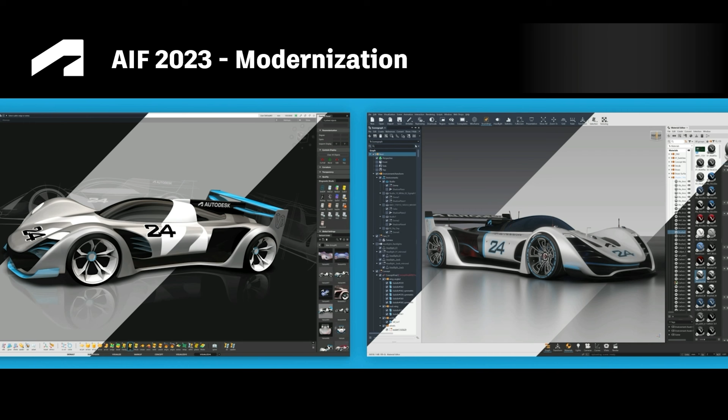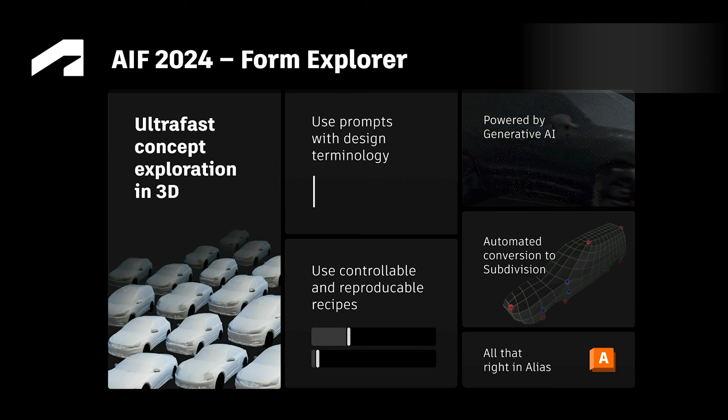Before we look into the future, let's look at the past. Back at AIF 2023, we delivered on a promise after a very long journey, which was the modernization of our apps, Alias and VRED. Then last year on this stage, we showed our first prototype of AI capability for creative form finding, called Form Explorer. Also at AIF 2024, we introduced a collaboration with a company called Navasto, real experts in predictive AI for simulation. As most of you know, Navasto is now not only part of our company, they are part of our team, which is amazing. Great to have you guys on board.

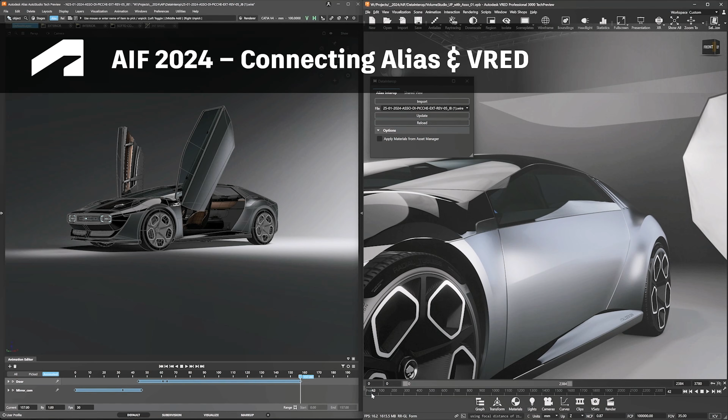Last but not least, last year on this stage we made another promise: to connect Alias and VRED seamlessly for the first time. This is not only the connection of the applications, this is the connection of the personas and the functions in the studio. So today, we're not only delivering on that promise, we're giving you an opportunity to change your process, to change the ways you work, with Alias and VRED being truly connected for the first time throughout the whole process.

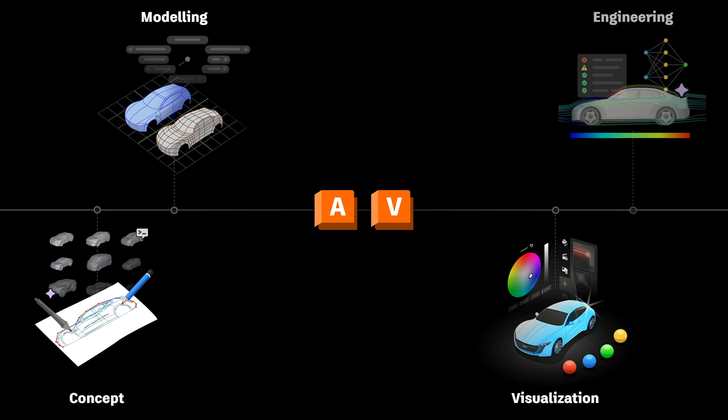So we're talking about concept, we're talking about modeling, we're talking about visualization, and we're even talking about some aspects of engineering. Now, for the first time, we're connecting the process end-to-end with Alias and VRED at the heart of it. So now, let's look at these connected workflows.

Welcome, everyone. For many years, we have all wanted to have a closer, better, barrier-free working between Alias and VRED. In order to make you guys more creative and do it all faster, you need a barrier-free way of working with the best-in-class tools. So I'm really excited to be able to talk to you today and show you what we've been working on, and how we are connecting our applications that help connect your design studio.

I'm going to start today by talking about three different areas. To bring modeling and visualization closer together, we're going to talk about how we're using shared components between our applications. We're going to talk about how we connect the core data next, and then finally, how we build connections across the entire studio. By doing so, we're going to give you visual consistency, something I'll touch on many times through the next couple slides. Let's start with the components.

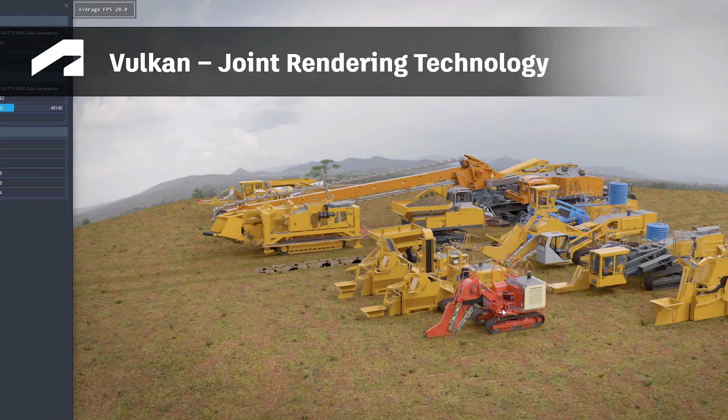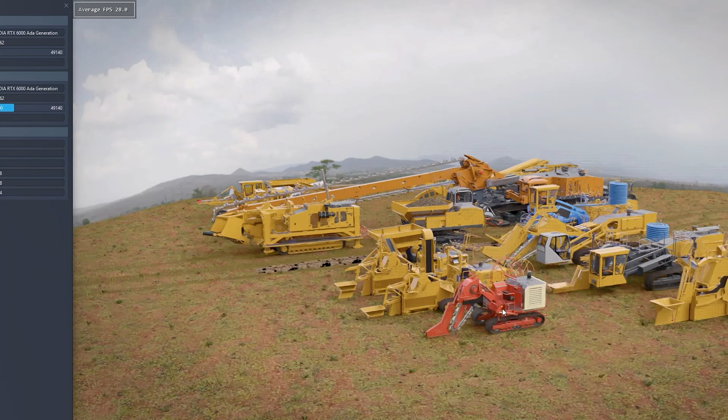Last year, we spoke about the changes we were making to rendering technology—migrating from OpenGL to Vulkan, a modern rasterization renderer that would give us the groundwork for amazing things in the future. Now Vulkan is becoming reality. It has become the shared rendering technology between our applications. It offers speed and high performance for handling really complex scenes. It better manages lots of lights that you put in your scene, making your images look beautiful. It gives us new visual improvements like screen space refractions and more realistic performance for displacement mapping. We believe that Vulkan will really change the way you work in real time.

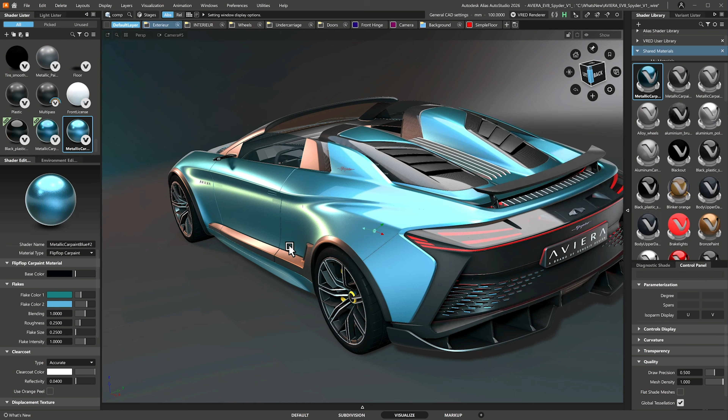More excitingly, with 2026, Alias now ships with VRED Vulkan technology. That means inside of Alias, you have VRED rendering along with VRED materials. The modernization of these graphics allows you to have better visuals, but more importantly, it brings consistency across the project—consistency with materials from beginning to end. Those shared materials mean you can achieve an identical look with the same lighting conditions, and it also means you can save time by reusing materials across your design projects.

And not only have we added support for VRED materials, but we've also added support for viewing AXF, MaterialX, MDL, and Substance materials. And we're partnering with Covestro to really enhance and extend our integration of measured materials.

And you can learn more about that tomorrow in our deep dives with Pascal.

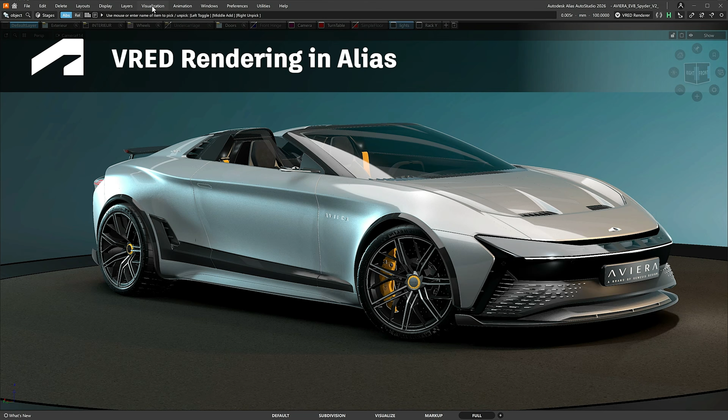And of course, this new VRED renderer in Alias also just provides better visualization throughout creative modeling and technical surfacing. It gives you new render settings to control the environment, lighting, ambient occlusion, and the addition of new color space and tone mappers. All of this gives you the ability to make the applications both look alike, while giving you a little bit more creative control.

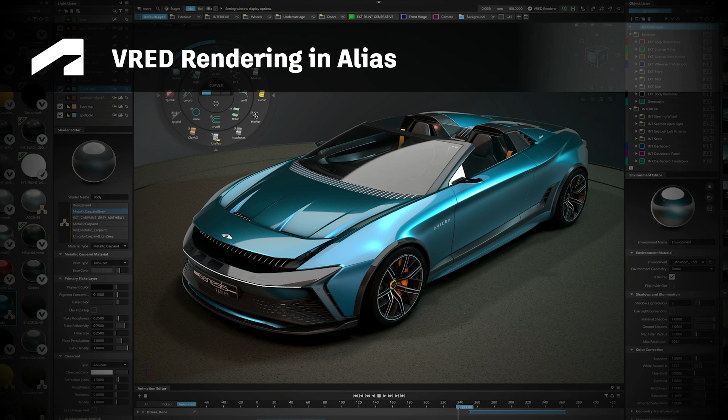So with VRED rendering in Alias, now you can have visual consistency from the beginning of the design process till the end. Visual consistency builds trust. Trust between the applications, but also trust that can extend into the real world. This trust means you can take more informed decisions earlier in the design process.

But next, we're going to talk about another project. And we're going to talk about how we're syncing the core of our applications, something we're calling live referencing. With both Alias and VRED 2026, you may have already seen this, we've released this new feature workflow we call live referencing. It was created to solve collaboration across the studios, between our applications, but also how we connect your teams and departments. More importantly, how we unlock new ways that you can work.

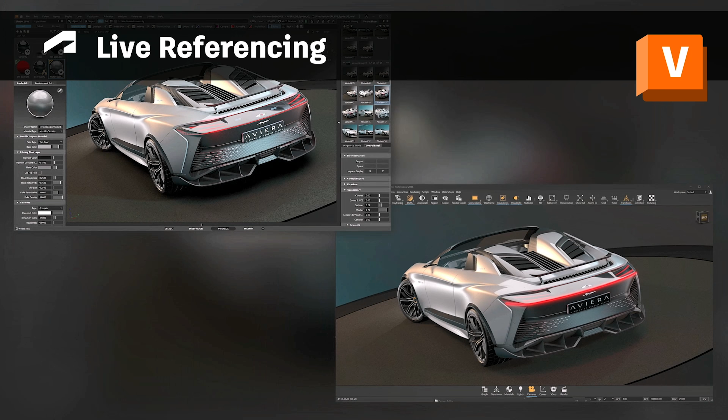So with live referencing, we now can do a lot of different things. We can fluidly sync important data and information between Alias and VRED, and also do so in almost real time. We can support the ability to update your scenes automatically, almost live in real time. We can eliminate rework with the addition of non-destructive overrides. We save you time through speed and high performance of loading data. We really think that live referencing will change the way that you design your vehicles today.

And importantly, we made it really easy to use. So enable it in Alias, choose a couple settings, whether you want it to be live updating or not, and you're good to go. Now you go into VRED, you open your live reference or create the live reference to that Alias file. The data loads extremely fast, and now you can begin working.

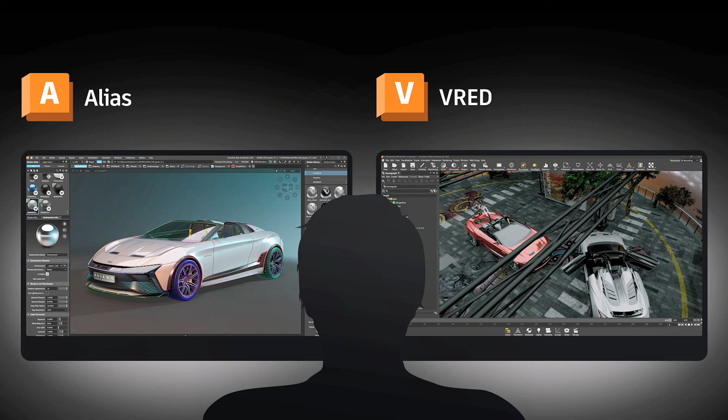So this sets up a really good workflow for lots of different people. Let's start with the individuals. This works great because they can use the power of both products side by side, taking advantage of the tools that you need when you need them. Like, for example, we'll hear more about later, our new render guide.

Enable live and automatic updates in our applications, and you can see surface changes happen instantly. The most valuable part here, though, is the overrides that we maintain. So as you can see in this example, you can maintain things like transformations and material assignments that are all maintained as the surface is being changed. This means that you can mock up ideas and concepts earlier, push them along faster, and at the same time work fluidly with Alias and VRED side by side.

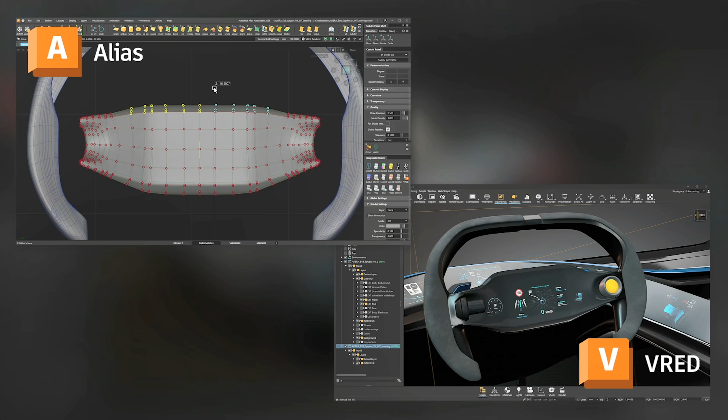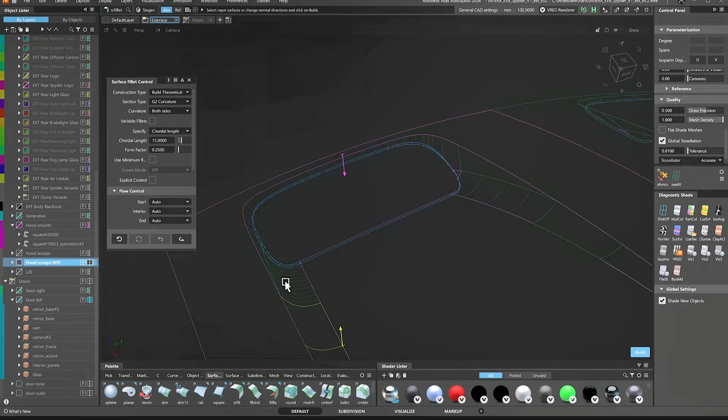But more importantly, it's really about how live referencing adds to the values of all the different ways you already work. So when modeling hands over components to visualization, those parts or files can be updated so many times during the process, and many times that adds a lot of overhead. You have to rebuild scenes, restart from scratch, rebuild or assign materials or variants. But now, with live referencing, we are enhancing your capabilities.

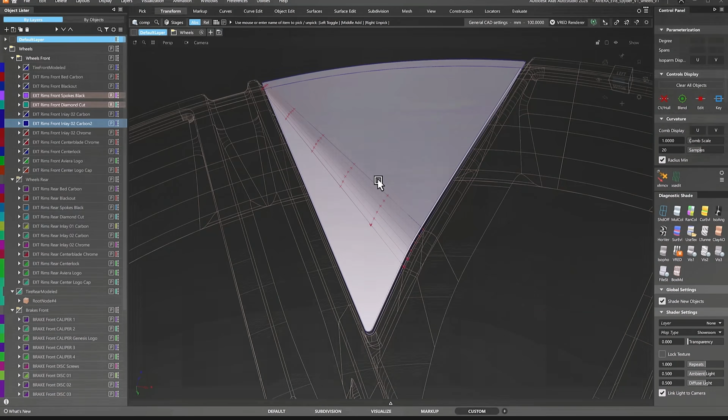Viz artists can create live references to a bunch of Alias source files alongside other data, like engineering data. They can choose when they want to update, and now updating is really fast. In the past, when you've been crammed for time to make sure to get something in for a review, and you didn't know if it would make it, now be sure that it can, with really quick updates, and see the latest changes at all times. All of this means that your models can continuously evolve, as they do in real life, and you will always be ready to review.

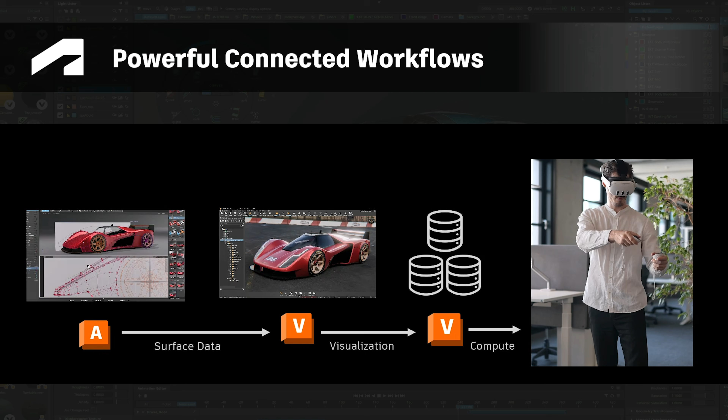At all times in this workflow between our applications, you can use Alias and VRED side by side, but VRED continues to be powered by high-quality hardware technology you may already have. You can run a streaming service to a display in your studio showing an always up-to-date version of how the model is evolving, or power a high-end review through XR or on your Powerwall. This means you can make live surfacing changes in real time, get feedback directly, and make decisions as those changes are happening.

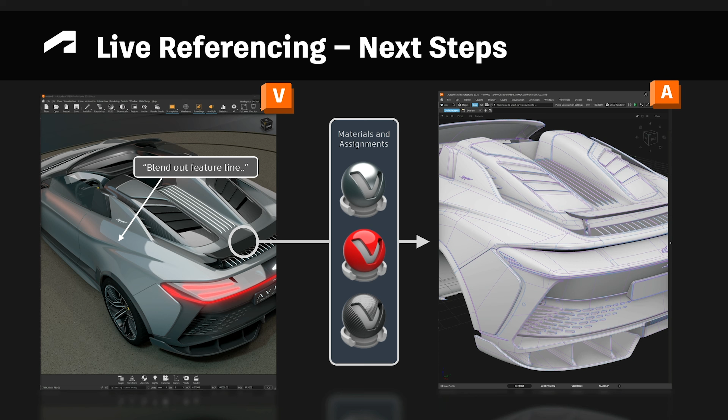Our focus for our '26 releases has been about getting Alias data into VRED very quickly, with good support for material overrides, transformation overrides, and more. But we also have a plan to sync things back. The two main ones I'll mention today are support for materials—so if you do material assignments in VRED, those can be pulled back into Alias—and review information, being able to take notes inside VRED and have those flow back with cameras or viewpoints.

We are super excited about live referencing and the technology it brings. We think it will help you save time and go faster, simplifying data handoff, supporting effortless updates and non-destructive overrides. It gives you enhanced capabilities, letting you use the right tool at the right time, and we're hoping it takes collaboration to the next level between users and teams, helping you make decisions fast.

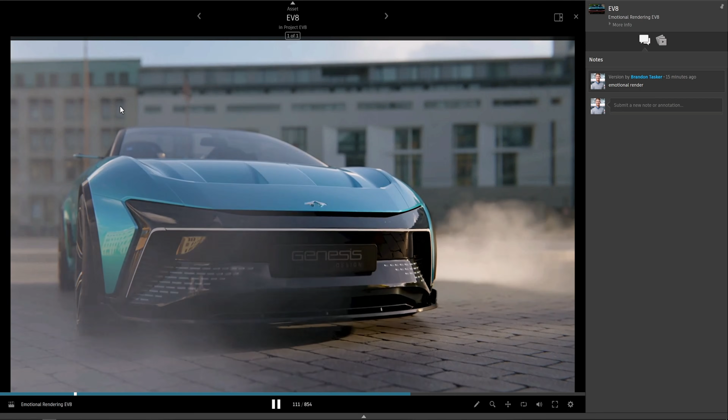Connecting our apps wouldn't be complete without Flow production tracking. Rendering in Alias and live referencing really complement working alongside Flow production tracking, which continues to be a critical tool given all the business pressures we're facing. This is a quick reminder of three ways we support you: Flow production tracking helps design collaboration through all types of handoffs, helping teams work together with structured organization. It adds transparency for everybody in the studio and for decision makers—knowing how projects are progressing helps you make informed decisions at the right time. Finally, it supports new ways of working; FPT and its ecosystem help you build powerful workflows that automate tasks and accelerate your design process.

So to summarize: VRED, rendering in Alias, live referencing, and Flow production tracking are building workflows that help you connect your studio, save time, and create the best designs you can with visual consistency from start to finish.

Awesome, thank you. Isn't that exciting? We're bringing our tools closer together than ever before, creating a connected system that amplifies the value of both individual products. And we're not stopping there.

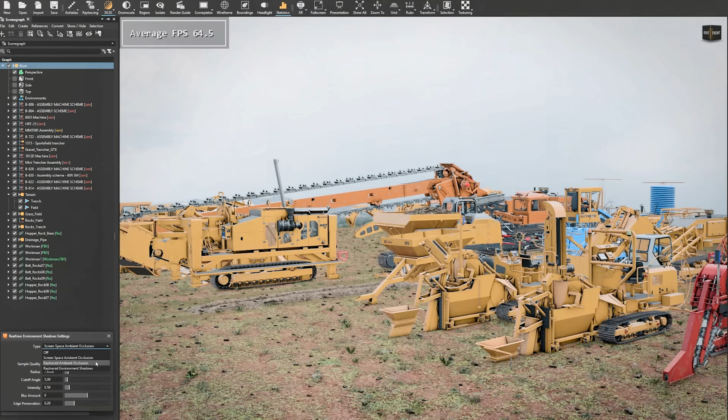All those features and effects work across all of our render engines: GPU ray tracing, CPU ray tracing, and the latest addition, called Vulkan. In Vulkan in VRED, we have additional hybrid ray tracing capabilities. You can, for example, add ray traced reflections or ray traced shadows on top of your rasterization image, lowering the computational cost while improving visual quality, and enabling use cases that were challenging before, like ray traced XR. This also reduces cloud computation cost for cost-sensitive use cases like online configurators or streaming systems. We'll continue to expand Vulkan's capabilities, with the next goal being direct and indirect illumination. So stay tuned for updates.

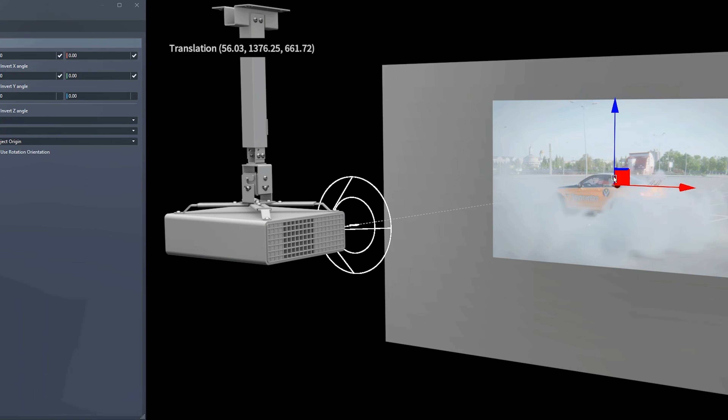While visual quality is key to evaluating a digital prototype, functionality is also very important. That's why we are adding both functional and physics-based constraints to ensure digital prototypes reflect the mechanical behavior and functionality, allowing physical interaction based on physics with the final product. For example, interacting with a car like opening a door in XR, opening the trunk, pushing a button, or rotating the steering wheel will behave just like it would in the real world.

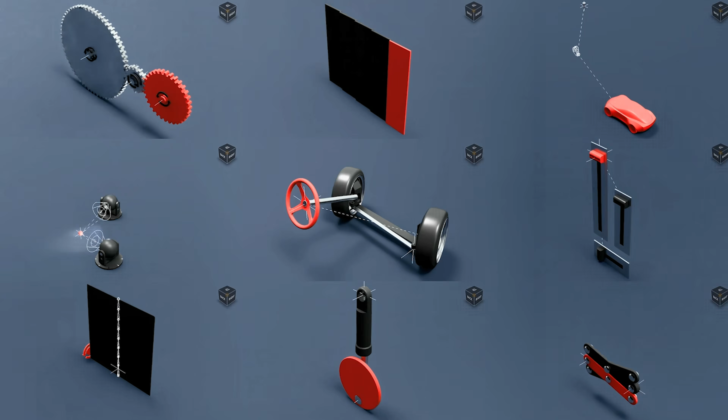We are also overhauling our already very powerful variant handling system, the variant sets, from VRED, making it more powerful and flexible with the addition of dependent variants or cascaded variant sets, as well as metadata, making digital prototypes not just look, but also behave realistically.

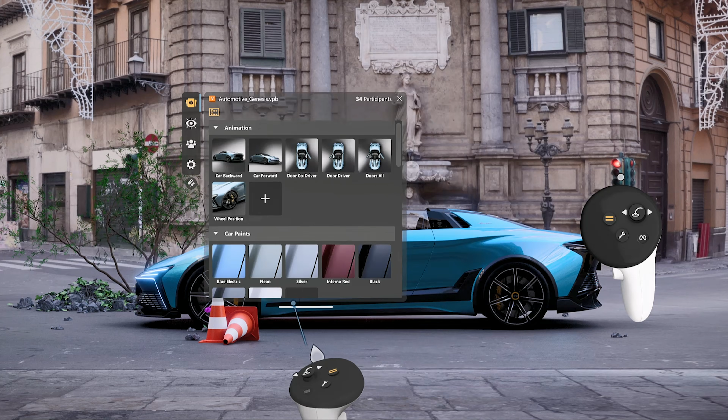Speaking about intuitive and realistic experiences with digital twins, XR plays a huge role, of course. It's becoming increasingly popular since see-through mixed reality and augmented reality is more common and easier to use. Some of you saw very impressive demos down there with the Apple Vision Pro or the Quest 3, because people feel more natural and comfortable when you can see your colleagues and merge the real and digital world, not enclosed in a virtual reality experience.

As it was with VR, we have completed support for OpenXR, providing all the XR hardware suppliers and partners an interface to connect to the VRED XR capabilities.

Next, very exciting, we're looking at overhauling our in-XR experience. You see some sneak peeks, some ideas that our teams have, in the video already. It's been more than 10 years since we started XR in VRED, since the menu was implemented, so we really want to make that more modern, more intuitive, and most importantly, more customizable, tailored to the needs of designers, modelers, visualization specialists, but also managers and decision makers. Now that we have a seamless connection in our tools, we can really focus on one holistic solution for XR that fits the needs of every stakeholder in the automotive development process.

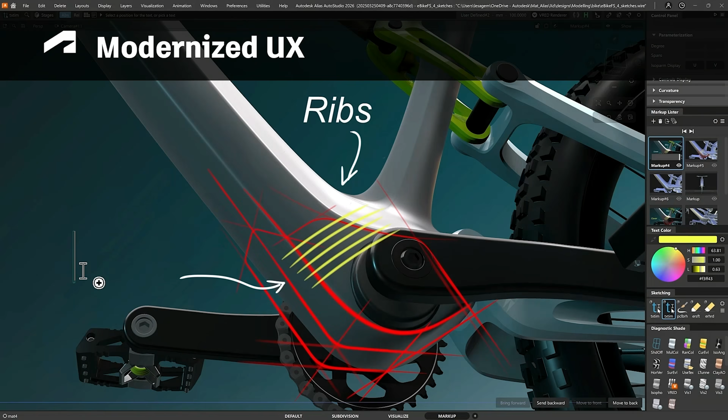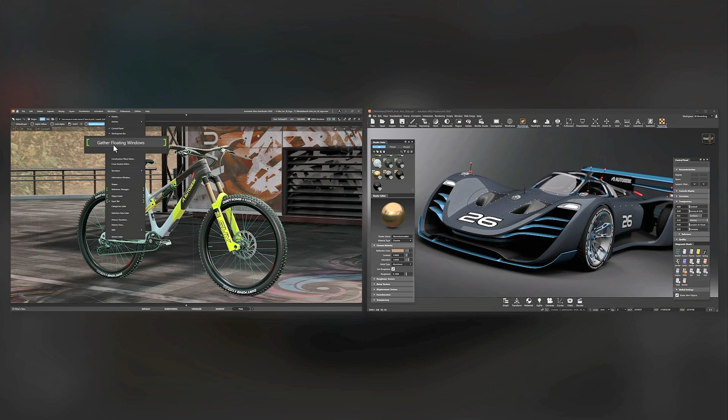It's not just XR that is evolving. We are continuously improving the user experience of our desktop products as well. After unifying the look and feel of Alias and VRED a few years ago, now we're fine-tuning the UX to maximize productivity. In Alias, you'll find enhancements like layer bar improvements, a text tool for markup, a function to gather your windows in case you lost them on a second screen, and updates to the palette and the shader lister, among other improvements. It's really important for us to not just have very capable core capabilities, but also to make them easily accessible, easy to learn, and efficient to use.

And for Alias, the core competency obviously is around modeling and surfacing. So let's start with the improvements around sub-D modeling.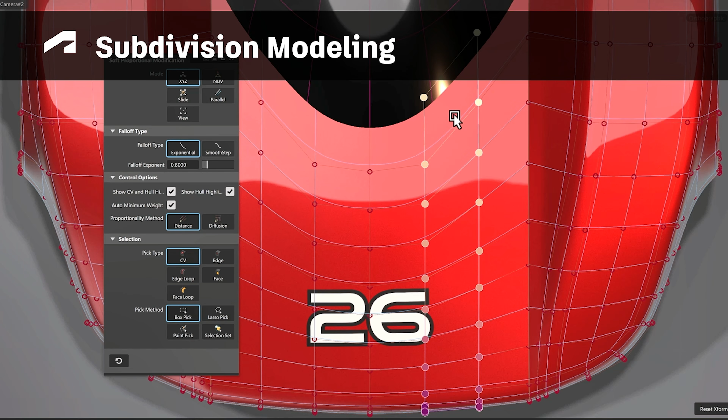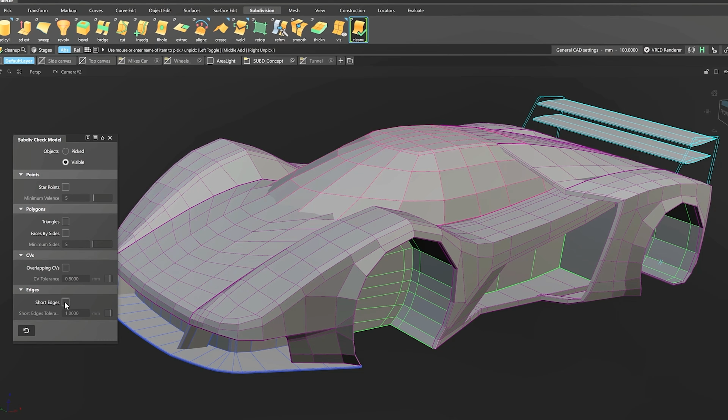Before we go into details, I want to highlight something. I have to go through the features pretty quickly, just highlighting some to give you an overview of what the teams have been doing and working on. Tomorrow afternoon there's a deep dive from Barry for Alias and Pascal for VRED, and I really encourage everybody to go in there, because I could only pick a few and give a few sentences to describe. But I think all the features are worth way more visibility and more detail than we can get in this one hour that we have here.

So let's get into it. Soft modification is the first feature I want to highlight in the sub-D section. It's a new tool that allows for proportional transformation of selected CVs with customizable attributes like fall off. Many of you know soft modification features already. This, combined with flexible selection modes like lasso, box, or painting, is a huge time saver for sub-D modeling, but also works for other CVs in Alias, so also for curves and NURBS.

The second one, and that's what you see on screen right now, is the sub-D check model. It's an automated tool that helps check and ensure the quality of your sub-D models, evaluating the control cage and highlighting issues you might have in a model, like star points, triangles, short edges, or overlapping CVs. So it's really a tool to assure that you can hand off clean data to a colleague or a different department, and also make sure you can check data you get from a colleague if it meets your quality standards or the quality standards of the job you have to perform.

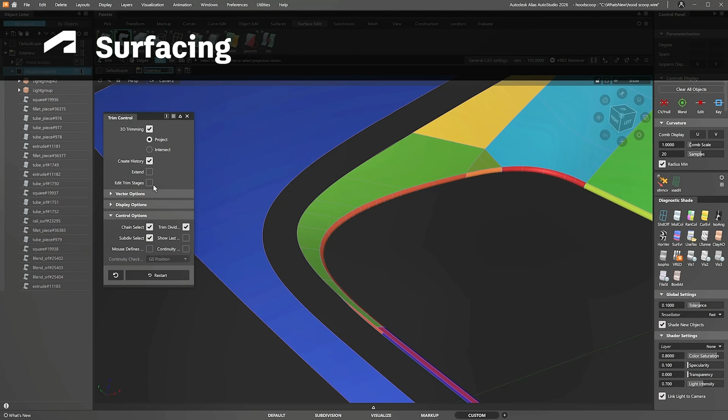But the very essence of Alias is high quality surfacing, and we have been continuously improving that space as well. Again, I can only highlight a few key features.

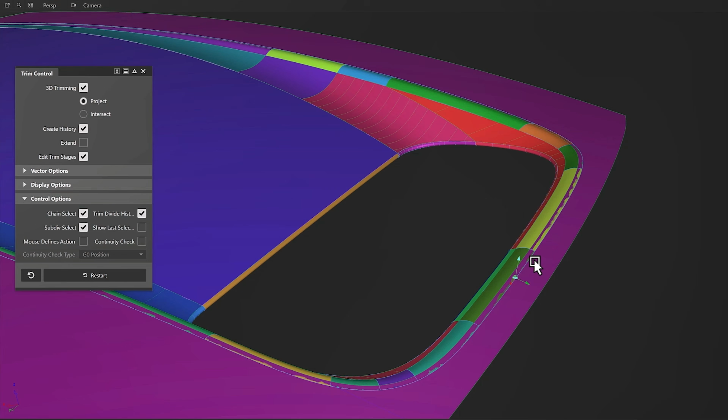I want to start with what you see on the screen right now, editable trim stages. This allows you to selectively modify trim operations without affecting others. So there's no more need to untrim stuff to change something, like going back in the sequence of trimming, or undoing the most recent trim operation to achieve something. It's a huge time saver because you avoid all those extra steps you had to take in the past.

The next one is trim extend. The trim tool is now smarter, especially when extending a curve on surface. It automatically switches to linear calculation when the extension would have failed in earlier versions.

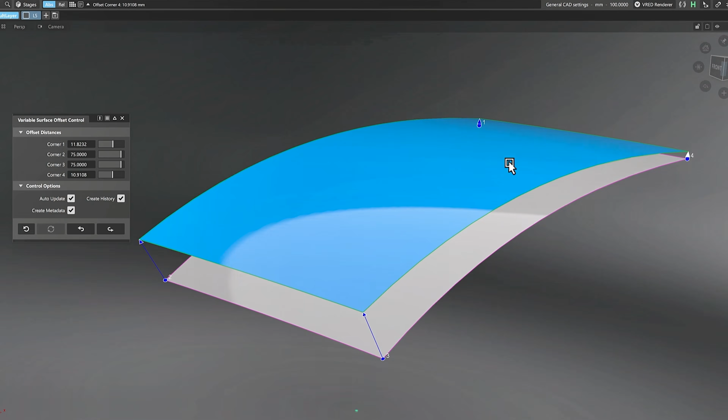And last but not least, the variable offset tool. It's a new tool to create non-uniform offset surfaces, enabling you, as you can see, with more control to control the distance of the offset based on the surface corners or edges. We are continuing to invest in surfacing excellence, focusing on improvements around corner blend or surface fillets and more tools you use on a daily basis, using both traditional but also more innovative approaches.

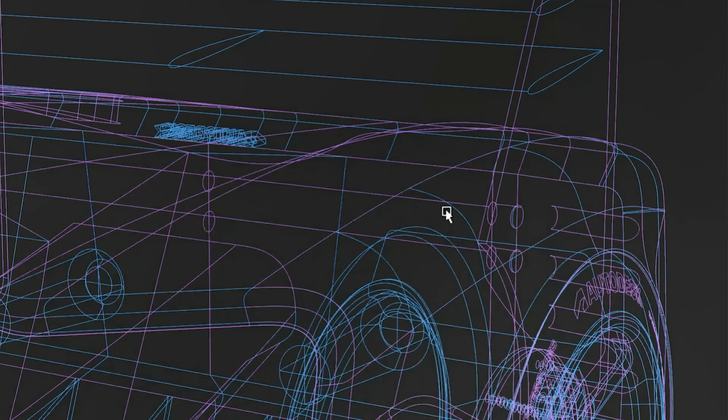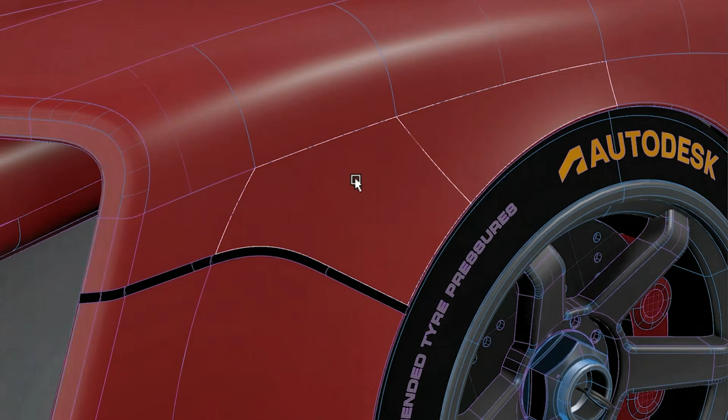Finally, I want to give you a sneak peek into something our teams are working on when it comes to where NURBS meet surfaces, or when sub-Ds, or when you want to convert the two into each other. We all know Alias combines this very unique approach of hybrid modeling between NURBS and sub-D, which is great, but sometimes you still don't have one or the other and you want to convert it. So our teams are working on tools that allow for semi-automatic, easy-to-use conversion between the two types—whether you need to convert an old NURBS file because you want a sub-D version to model on top of it for more flexibility or easier handling, or if you want to convert a sub-D model to NURBS for downstream use. This will allow for a smooth transition with minimal effort.

So you can see that we are strengthening our core capabilities, the very essence of our products, while modernizing their user experience to make it more accessible, easy to use and to learn, and more efficient. This work now pays off for both Alias and VRED users, as we have this connection between the tools with live referencing. We can now really focus on the tool's core competencies, as they are seamlessly connected, and we don't have to replicate a functionality in one or the other, because you can just move from one tool to the other depending on the job you have to do. So the core capabilities of our products are stronger and more powerful than ever, and we'll keep innovating to stay cutting edge, just as we have been over the last decades.

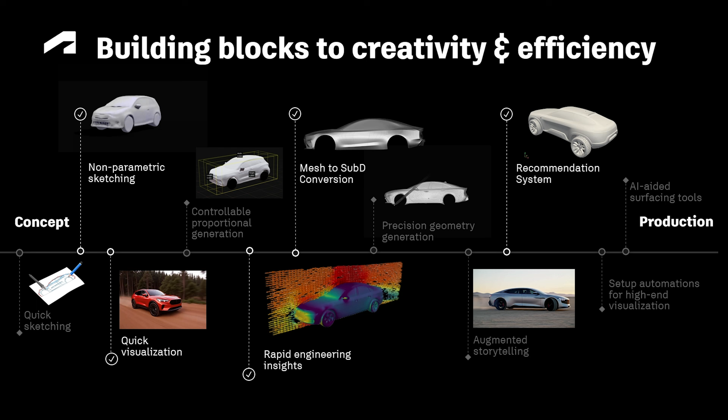In concept design, we're thinking about how we can speed up concept iteration with new ways of sketching and new ways of integrating language prompts. In modeling, we want to bring faster form development and more control and guided editing into how you use 3D AI tools. In visualization, we aim to speed up storytelling and help your teams align faster. And on the engineering side, we're bringing performance data earlier into the design process with things like Navasto.

So across all of this, our goal is very clear to us: we really want to accelerate design workflows and bring Alias and VRED users closer together.

We have three core principles guiding how we're building AI tools. Number one, we want to generate functional geometry that's useful to your teams and shorten the path to usable geometry. We want to help you share compelling product stories, removing friction from design storytelling. And we want to connect disciplines through data, transforming data that's trapped in your engineering or design organizations into a resource that can accelerate design decisions.

Starting off with functional geometry, Mike showed this morning that Autodesk is doing a lot of research on pushing the state of the art in 3D generation. There's a lot happening in industry and academia, and we're working on integrating different aspects of this technology into automotive design.

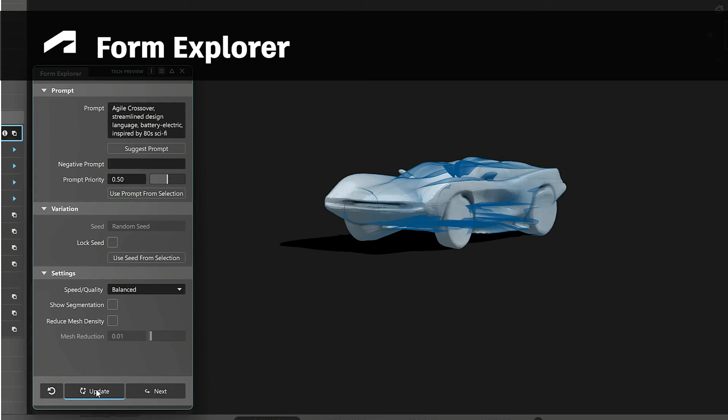As mentioned earlier today, the first step of this is Form Explorer, the first integration of 3D Gen AI into Alias. It's a plugin that allows you to create vehicle concepts in seconds. A user can leverage automotive-specific design language to generate and refine explorative concept geometries. It delivers a real-time experience, real-time interaction, and editable outputs that help designers generate automotive exteriors in seconds.

The unique thing about this is where the magic of natural language meets design. Using just a few words, designers can instantly explore a wide range of concepts, sometimes fast, sometimes exciting. They push your creativity forward by generating ideas or concepts that you might not have otherwise come up with naturally. This novel creative exploration process can help you break creative blocks and give your team a broader foundation to build ideas upon.

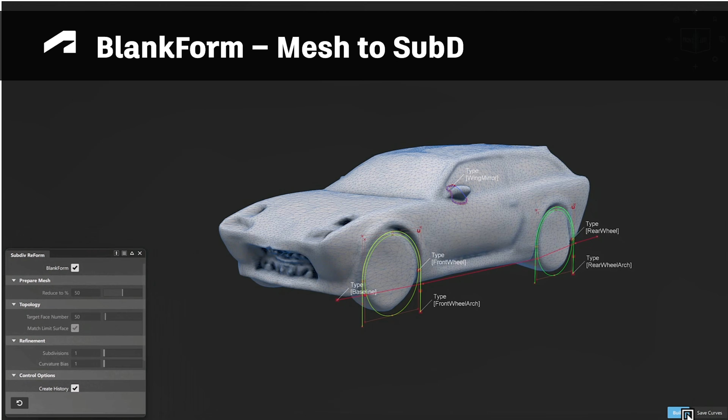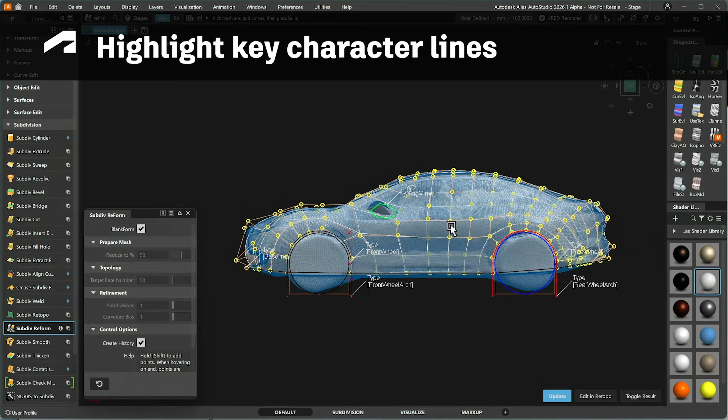Once you find a novel shape or form that you want to explore, you want to turn that into a functional geometry, a sub-D that you can modify further. So what we've been working on, an evolution of reform called BlankForm, gives you the power to transform a mesh into a usable sub-D model: first by making a conversion, then by highlighting key character lines that the AI generates, which are the core expressive elements of what the AI has produced. Using these guide curves as constraints, you can align control vertices in your sub-D model and create a refined surface.

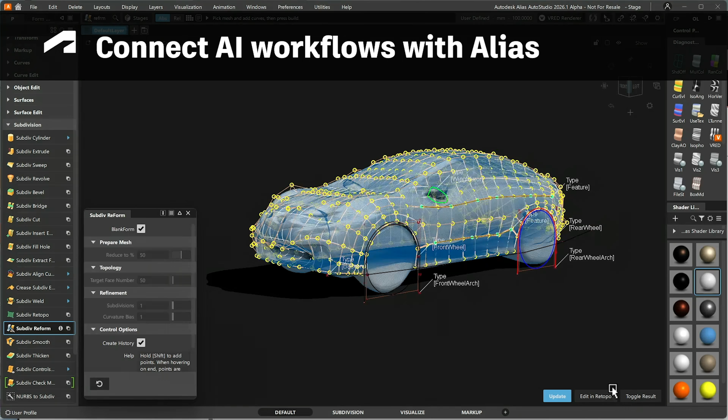In this way, you can create a refined iteration of a new subdivision surface and add or remove guide curves to emphasize key features. The core idea here is that we want to help you remove any noise generated by the AI and transition into detail surfacing as smoothly as possible.

So to also accelerate concept storytelling, we've been exploring different ways of integrating image generation AIs into Alias and VRED workflows. The first exploration we've created is something called Snapshot, which allows you to generate and share explorative image concepts quickly.

You can use Snapshot together with live referencing to create visuals generated from meshes created in Form Explorer. So whether you want a photorealistic render, a sketch-styled image, or a simple shaded view, it's all built into the interface. You don't need to switch into another tool or export files.

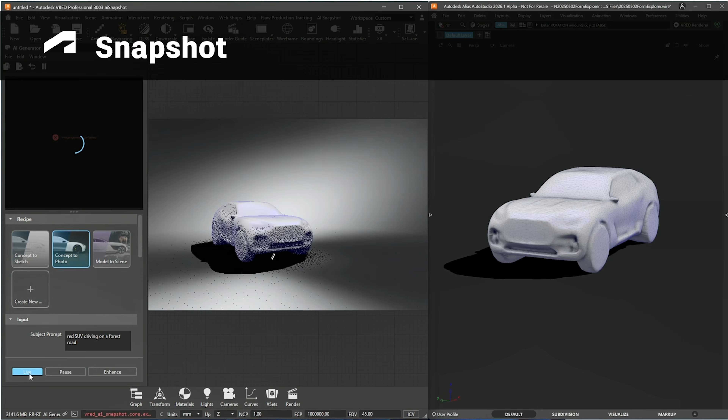It gives you a helping hand in preparing for a design review or a conceptual review, or just getting some quick visual feedback. And once your visuals are ready, you can send them straight into Flow Production Tracking.

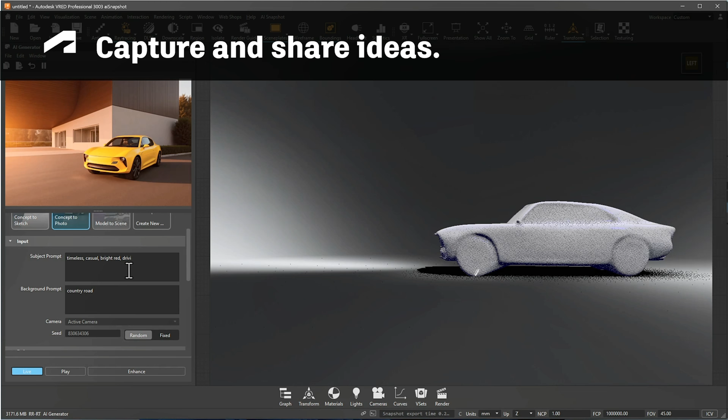That means no more saving screenshots to your desktop. Just share it directly in Flow Production Tracking with someone on your team—no lost links and emails. It's really just a quick way to get an idea recorded, share it for feedback, and even get it marked up with quick iteration comments, and move on with an effective design faster than ever.

So putting it all together, Form Explorer allows you to evolve an idea from a blank page. And when you have something you like, you can create a visual of it in Snapshot and share it with your team in Flow Production Tracking.

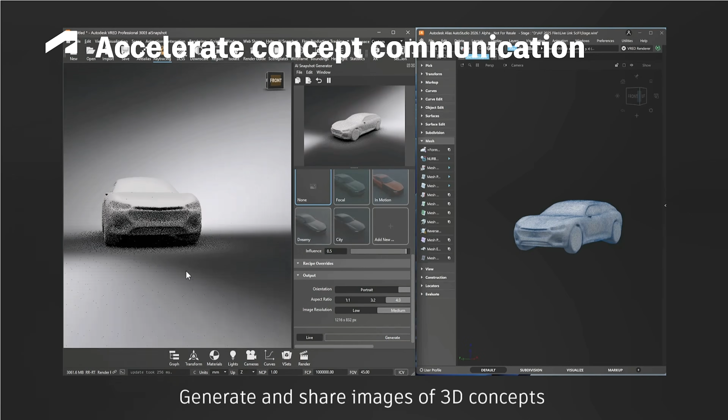Using blank form, you can take every mesh that you generate with an AI and refine it using the same subdivision tools that you know and love from Alias. All of these capabilities combine to accelerate concept design and concept communication, bringing you closer to a winning idea. So I'm going to hand it off.

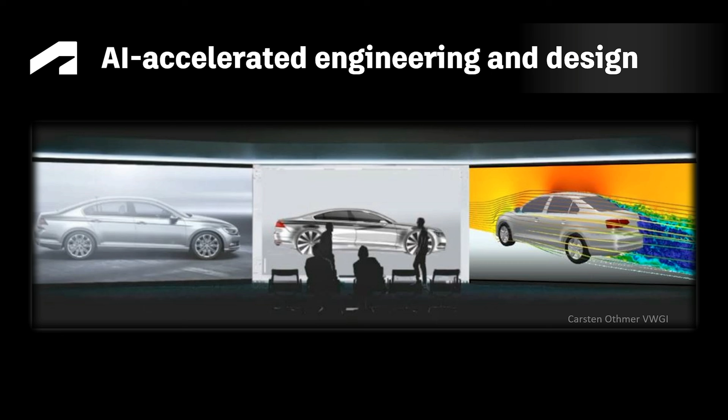Our idea of AI-accelerated design and engineering is that people from different departments are enabled to meet in one room and work together interactively. They can produce new designs, evaluate the impact of design changes on performance, identify areas worth fighting for, and everything in real time.

Since those AI predictions, even on a laptop, just take a few seconds, you can really work in real time and make decisions within that meeting without having to postpone those decisions to the next weekly meeting, since you have to wait for time-consuming simulations from the high-performance computing system.

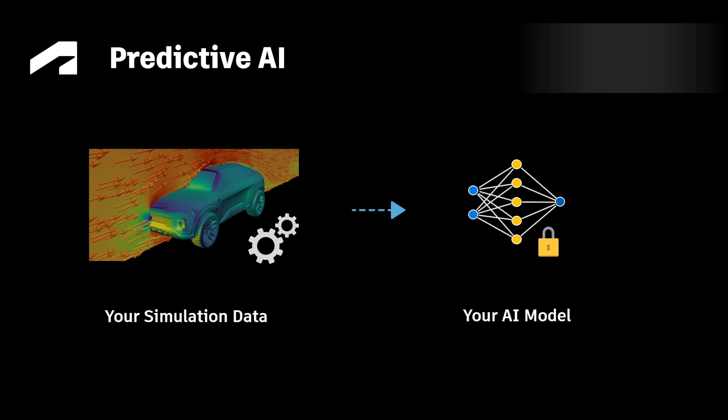So how does this work? If you want to unlock predictive AI in your design process, the first thing you need to do is train an AI model. Our software enables the customer to train their own custom AI models based on their own simulation data. Once the model is trained and deployed, every time a user comes in with a new design, they can use the pre-trained model and get fast results almost in real time.

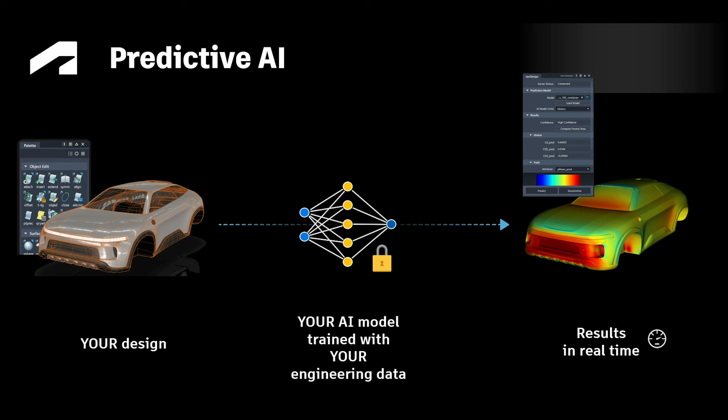Since this technology is meant to accelerate your existing design processes without disturbing your flow, I'm really happy—I could almost say it's about time—that this technology is now fully integrated in Alias.

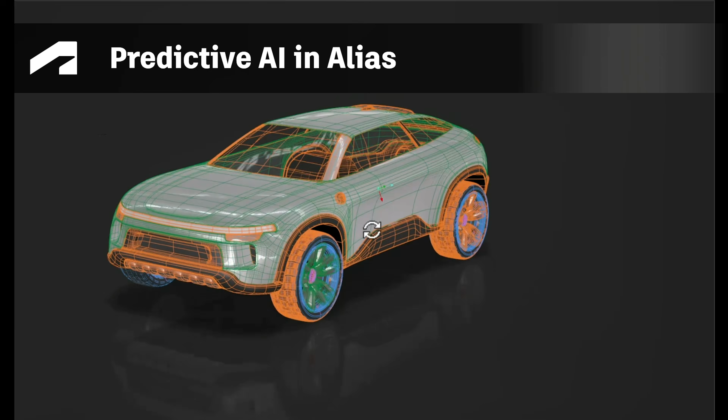So it looks like this: whenever you have a design you see fit for a performance review, you just open the plugin, load your pre-trained AI model, mark the geometry that should be evaluated, and hit the predict button. Then you get instant information about all your key performance indicators, like drag, lift on the rear axis, front axis, and field variables like pressure distribution.

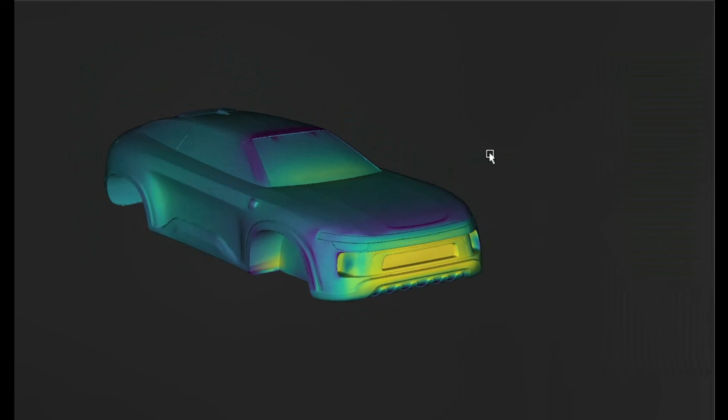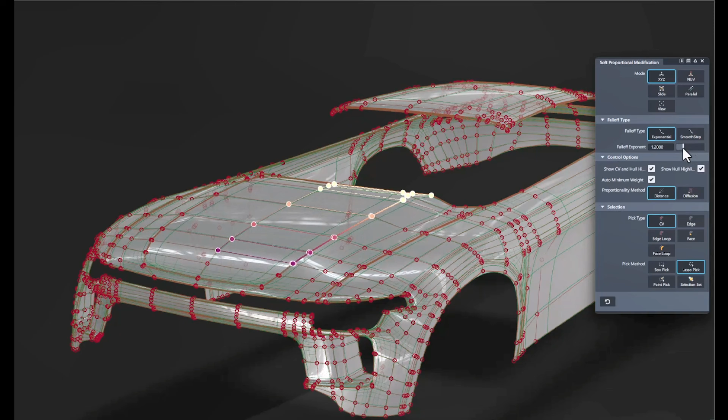Once the performance review is done, you simply switch back to your normal way of working—on SubDs, on NURBS, using the new soft modification tool—and create the next variant. You can create variants with larger changes, like here on the hood, or incorporate smaller, local changes.

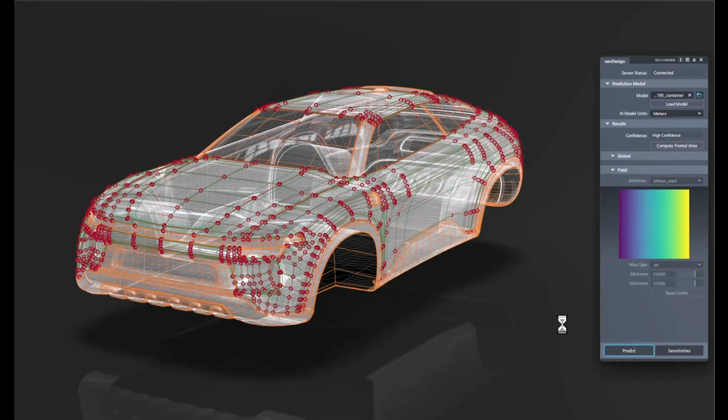This is something that is not disturbed—it should not be any different. Again, once you're satisfied with your results and want to evaluate performance, just reopen the plugin and hit predict again, and you get an update on your performance indicators. You can also change the color bars and ranges for a more sophisticated review of the results.

But at the end, it's not that spectacular. It's really like an additional functionality that should accelerate your work. So let's look a bit deeper into the process.

Usually it works like this: you design one variant, you evaluate the performance, and sooner or later you may not be completely satisfied with the results. I think that's quite natural, and I think we cannot fully resolve this yet, and my personal opinion is also that we should not. But what we can do is recommend a few options, a few possibilities that fulfill all your objectives and constraints. This is what we call a recommendation system.

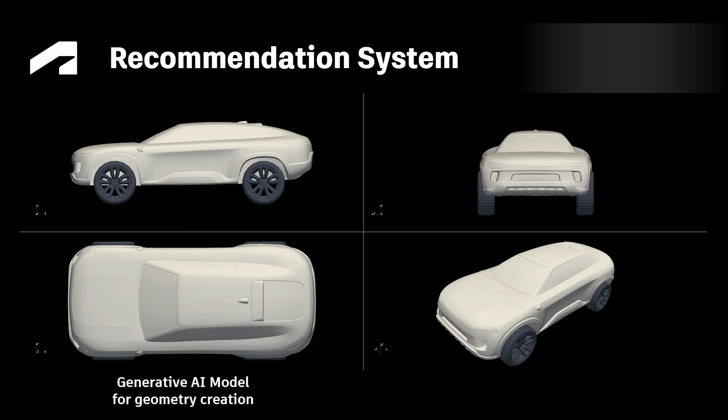Our recommendation system combines predictive AI with generative AI that produces unlimited new variants of your design, which look like this. You see it's quite a sharp geometry with smaller changes. There's a lot of automatic testing, and it stays within the customer branding. So this Autodesk SUV is not transformed into a Porsche or any other car unless you want it to be.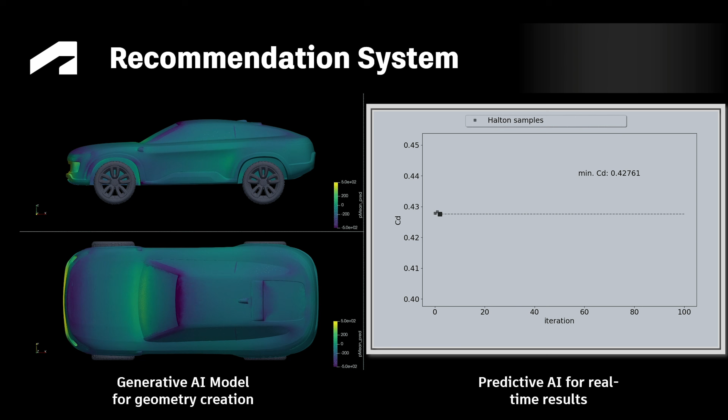And with each of those variants, you also get the performance, the aerodynamic results from the predictive AI, which could look like this - this is the pressure distribution on the surface of the car. But of course, you also get some scalar values like the drag. And you have the possibility to combine this technology with optimizers and, for example, run a drag optimization over roughly 80 iterations.

So you see how you produce new geometries - they all have results. And one important thing to note is that such an optimization task has a turnaround time of about 30 minutes. So the idea is that you head out for lunch, and when you return, you have plenty of options available.

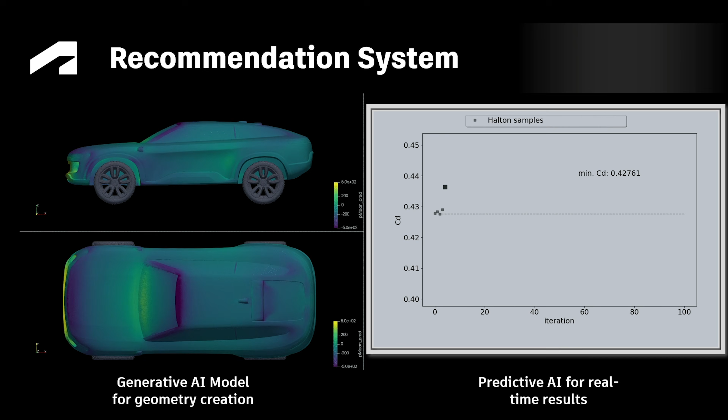You can either just pick the most promising design and trust the prediction. Or you can say, I would never completely trust the prediction, I need additional insurance, I want to run additional high-fidelity simulations. But maybe you don't want to run 80 simulations - maybe you only want to run those simulations for the most promising 5 variants. You also have the freedom to choose on your own whether you just want to pick a fraction of the inspiration the AI gave you and continue in a different way.

And this is quite important - we really see this technology as a recommendation system, maybe also as a pre-selection system. At the end, it's really your choice what you want to do with it. At the end, it should accelerate your process and serve as an assistant.

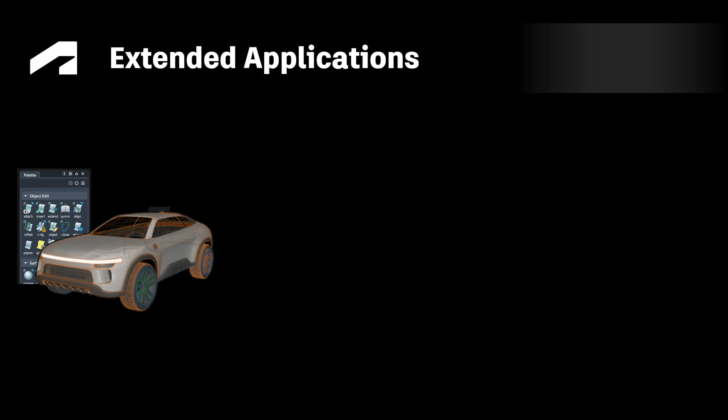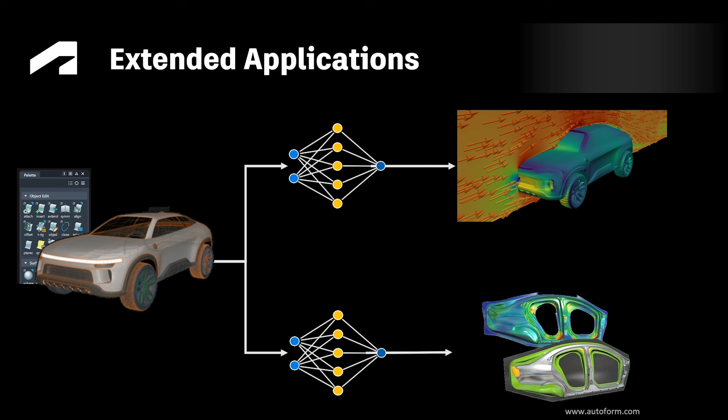The next important thing is this technology is purely data-driven. So it is not limited to predicting aerodynamic results, like I showed in those slides. You can also use it to predict crash simulation results, get information about the durability of critical parts, or about the cost of sheet metal stamping. Again, it's about the workflow that really serves you.

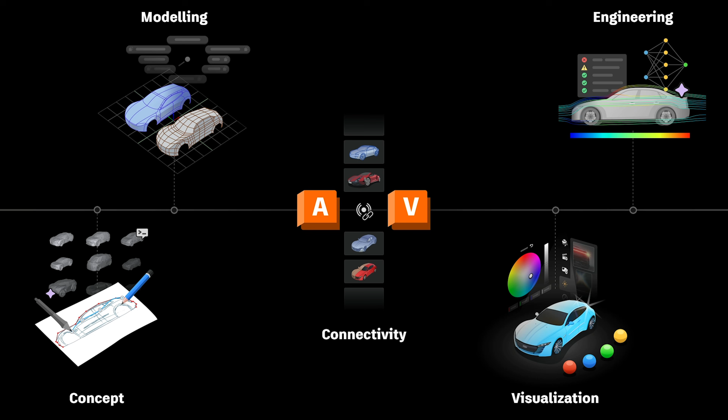That is a lot of stuff, of course. But please rest assured, Autodesk is here to make sure that you can turn slides into your reality. We are outside. We want to talk to you throughout the next two days of this event. We want to hear from you. We want to collaborate with you, which is really key, so that we can help you accelerate your process, to shrink your development times from the first idea up until the point where your design hits the customer, hits the road.

But before we end the session today, let me highlight a few more sessions for you, which are going to take place throughout the next 1.5 days. I cannot mention everything, but of course we have our product deep dives already mentioned. They are going to take place tomorrow in the afternoon.

At the same time, we have Mathieu from our experience design team running dedicated sessions with a few of you customers to really learn and collaborate with you on the future of user experience. Of course, we have our Whisper Suites with AI topics covered by Matthias and by Timo, and we have a whole raft of experts here with Pascal Seifert, Barry Kimball on the deep dives, and more technical experts, whether it's Bianca, Michael, Lionel, and Dan, just to name a few.

So thank you very much for attending our keynote today. As I already mentioned, please take the advantage to talk to every single one of the product team and everyone downstairs at the booth. We're really looking forward to turning slides into reality as one team. Thank you.